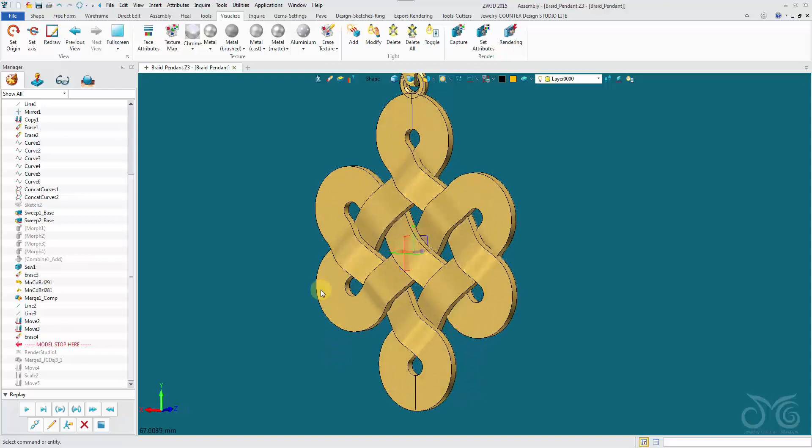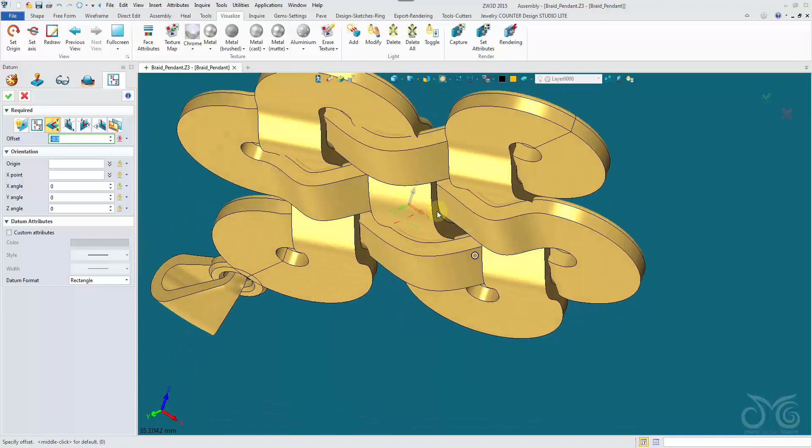The first one, we extrude or face offset these faces and then trim them to a plane. Let's first insert a datum plane. We want this top-down datum, the XY, and we'll drag this down to a reasonable point. Let's say negative 2.25.

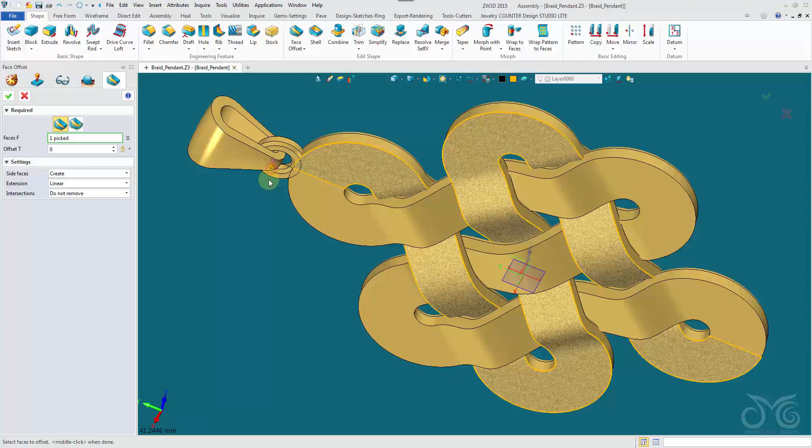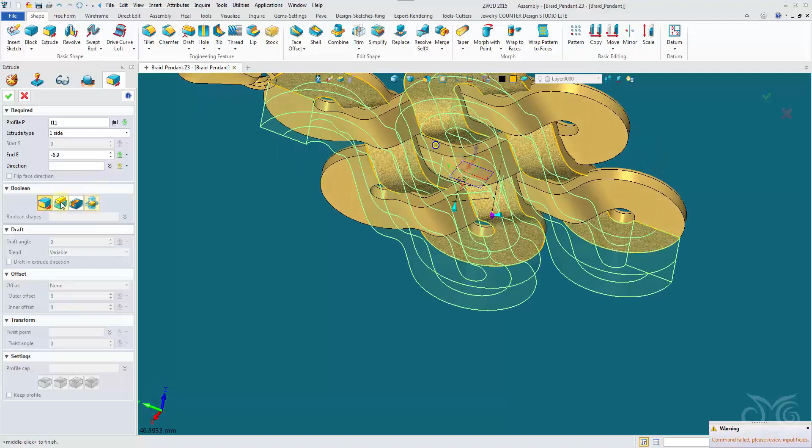We'll then see if we can get away with a face offset. It's not liking it, it's getting a bit crazy the further we go down, so let's instead extrude the face, extruding it one side just down. We'll boolean it - actually we won't, we'll keep it as a base - and confirm there with middle click. Get the opposite side, bring it down.

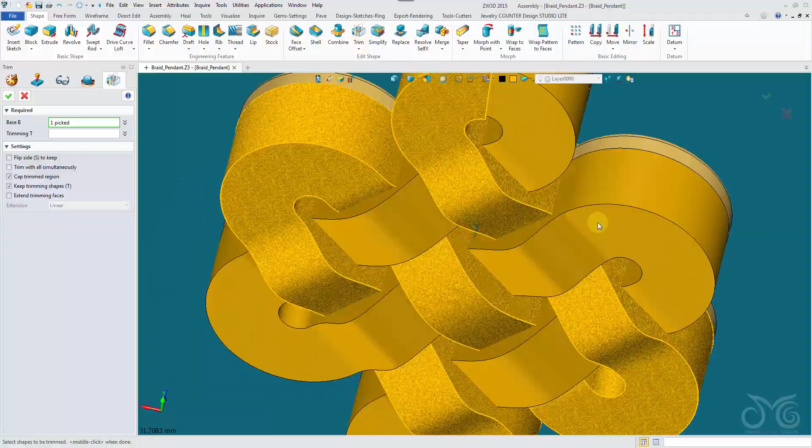A bit further, we're just going to trim it. Then we come to our trim, get our two shapes, and then grab the datum plane to do the trimming. Confirm. Okay, there's our flat back.

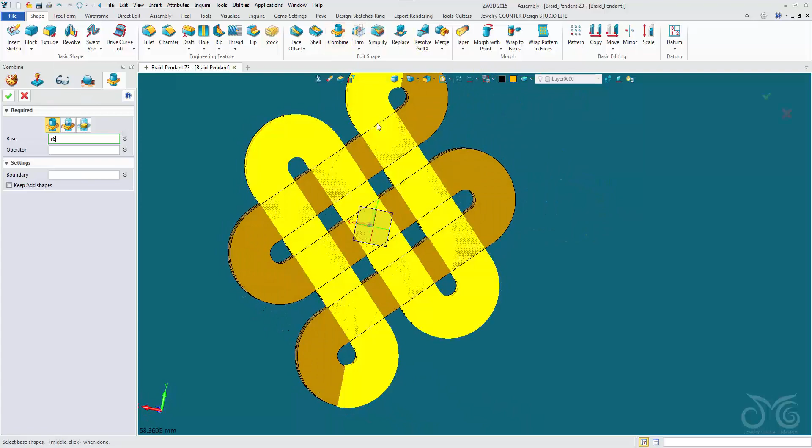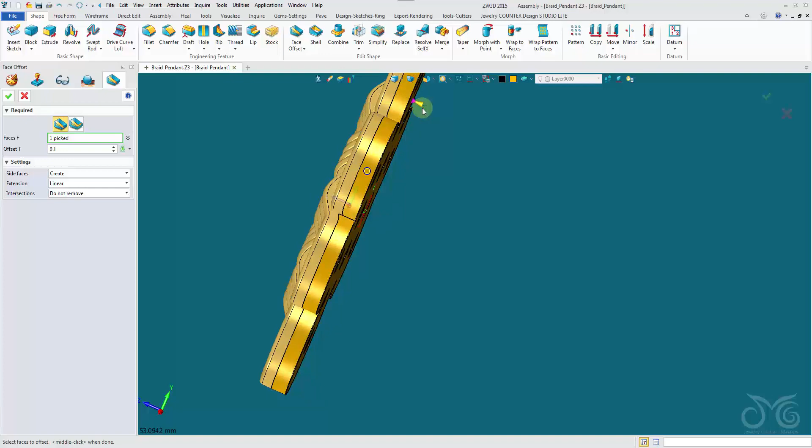Now we can combine, add all of our parts. It's smoothed out nicely there, and then we can come in and face offset this again. Okay, so there's the flat back.

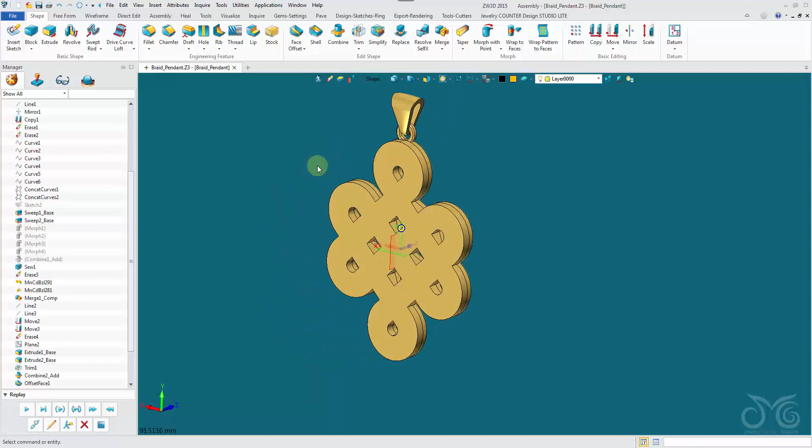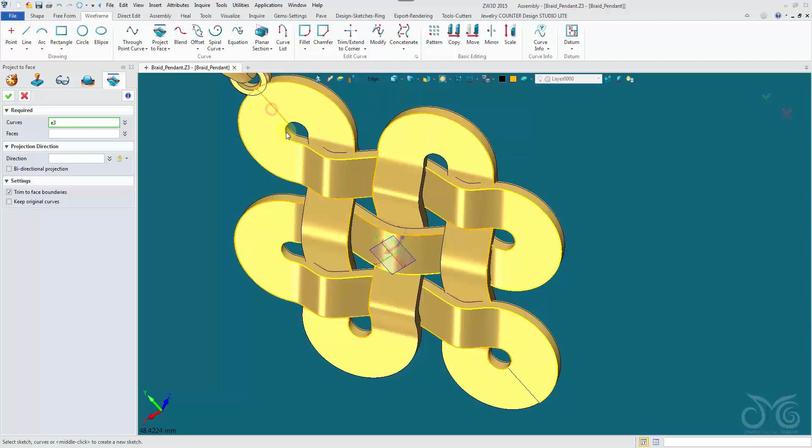That's one strategy. Another strategy is to come back prior to the extrude - we'll keep the plane there. Instead of extruding the surfaces, we will project the edges, all of the edges down to the datum plane that we created.

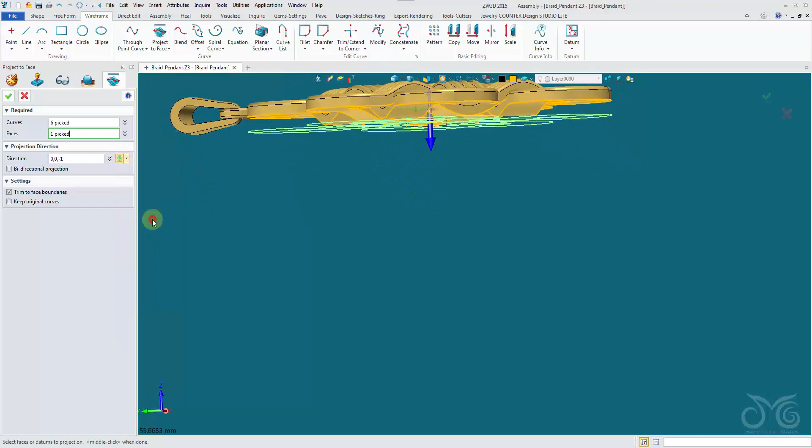They'll be going by default in the right direction, but let's force it to make sure - negative Z. Confirm. Okay, so we have some curves here now. Then we come in and erase these faces.

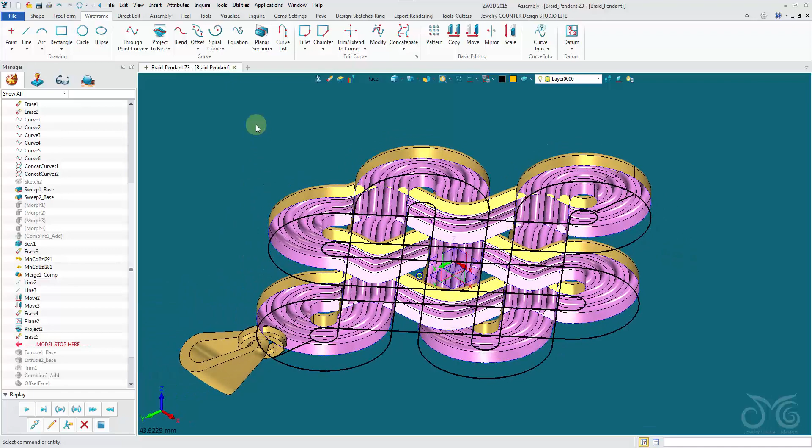Now we will build up our deeper face again and the flat face. So we'll come into the freeform shape tools and use the loft. There are various tools we could use for this. Maybe we don't want to use the loft - we could use the ruled surface. Let's see if this is going to come in.

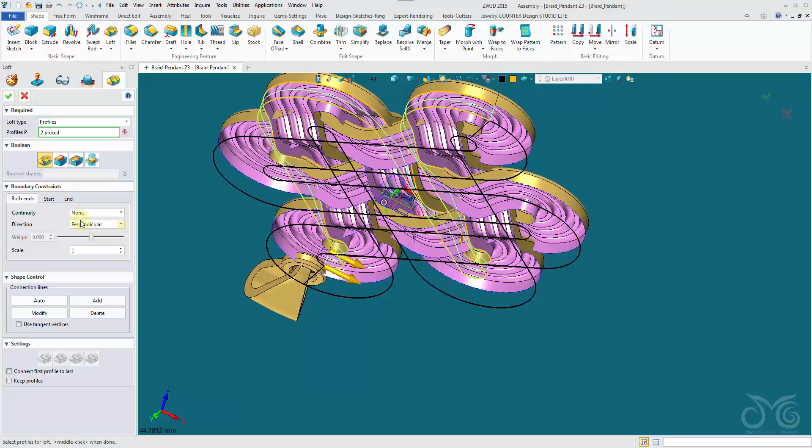We want no tangencies. It seems to have worked fine. We could have used our ruled surface instead - let's see if this works. Okay, this one may not be so nice.

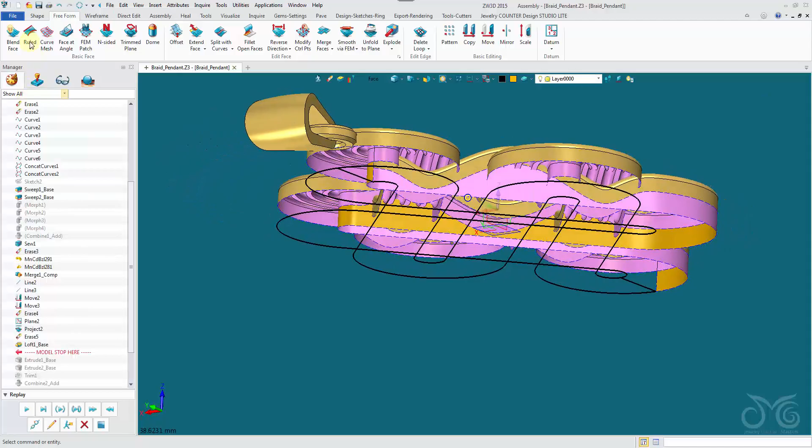Let's go back to our loft. We'll just loft the rest of these down. Okay, so we've built up our sides there.

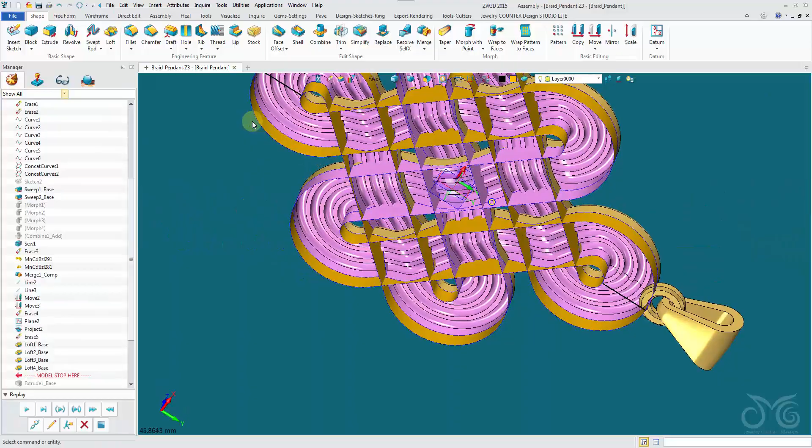Now I just need to build up our lower face, and again there are multiple ways to do this. We could come in with our bi-rail loft, give that a go, picking our two paths and our profile. Okay, it's not getting the corners so nicely.

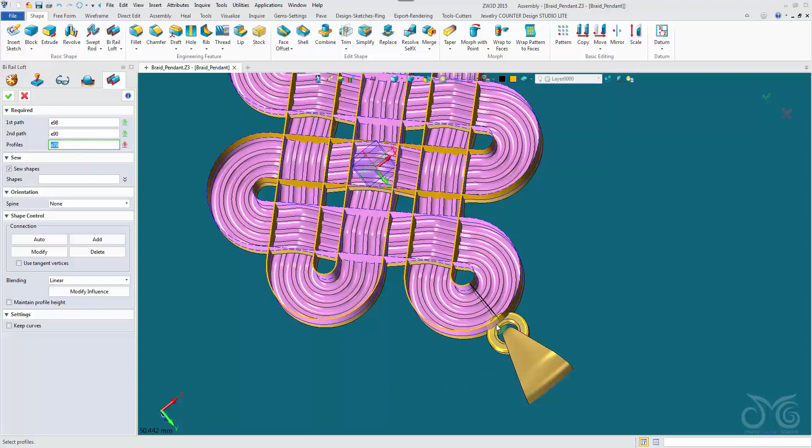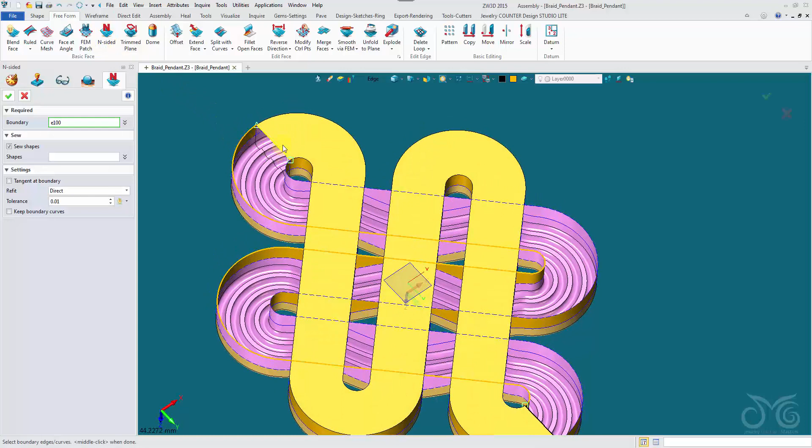I don't like that one. We'll come in and try the ruled surface instead - that's looking nice. Or maybe the N-sided tool, or the FEM patch, would work well for us too.

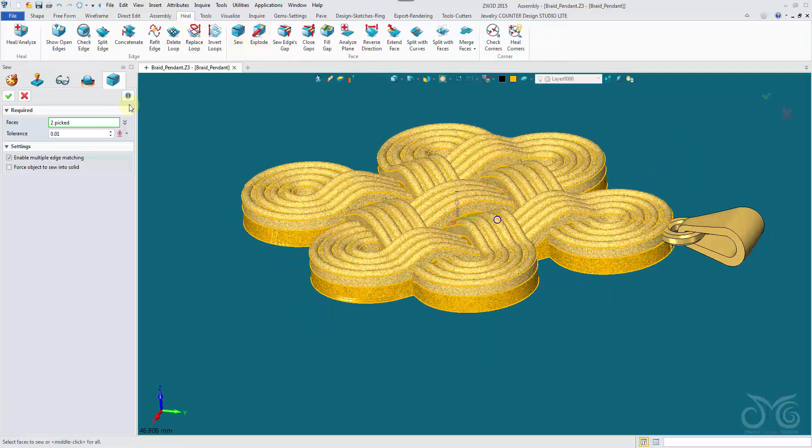That's worked nicely and it's completed our shape. We can still see it's not one complete shape because of these dotted lines, which show an open edge. So then we want to come in, heal, and sew our shapes. And there we have our flat back again.

If we wanted, we could do the face offset to bring that back in. So that's two strategies for getting a flat back to an otherwise non-flat surface.